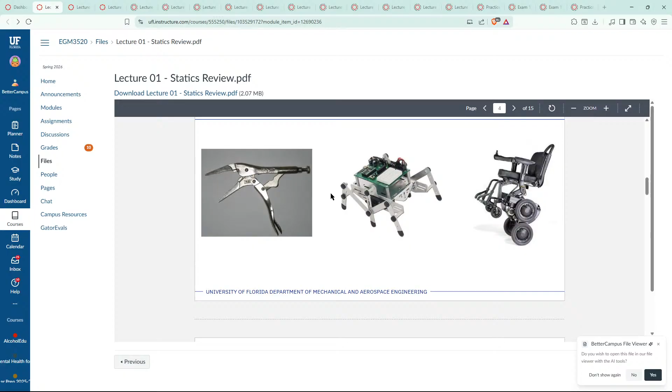Anyway, we're learning stress and strain today, chat.

It doesn't say my name anywhere, does it? No. It shouldn't. If it does end up saying my name, I'm just like immediately ending stream. I don't care that much. This is very much a not worth losing my anonymity. That's a lie. I've lost so much of it already. I think I've already said my name.

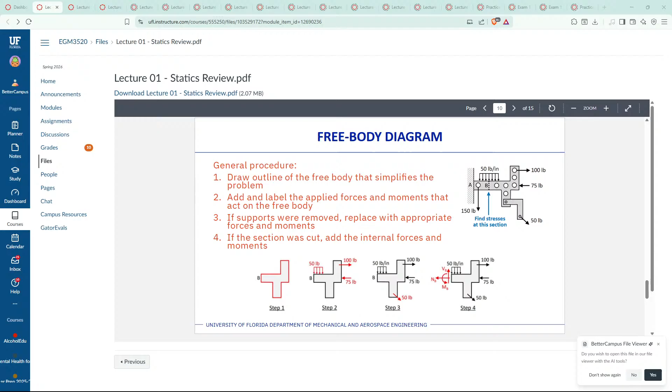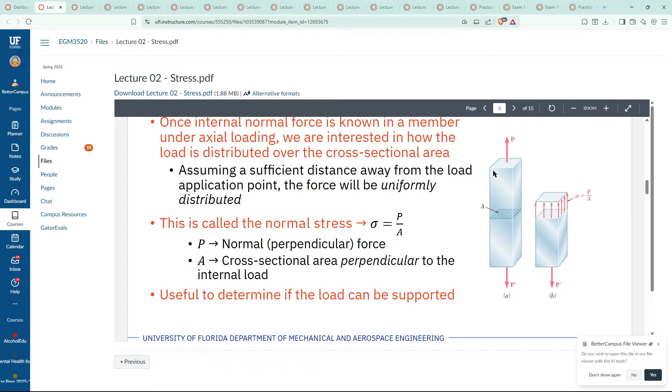There's really nothing. Oh, free body diagram. That's so easy. 2, 4, yada yada yada. And that's lecture 1 done. Stress. It's still like basic stuff that I kind of understand. So this is just you got force P divided by the area, and that's just like the stress, which makes sense. It's just how it's distributed.

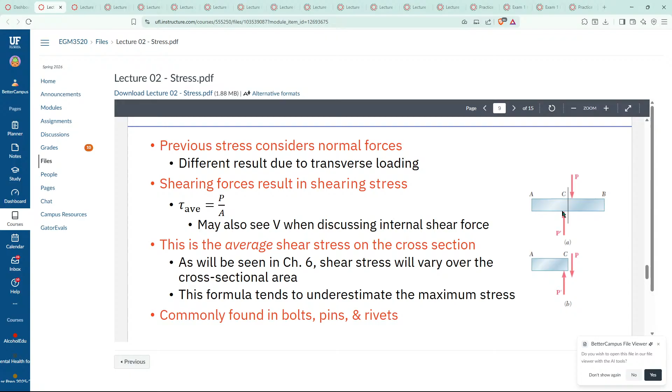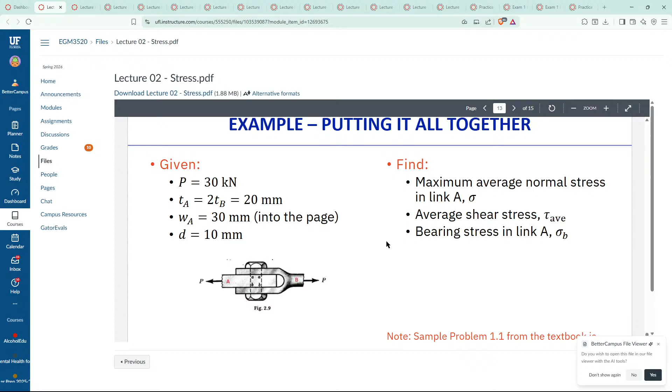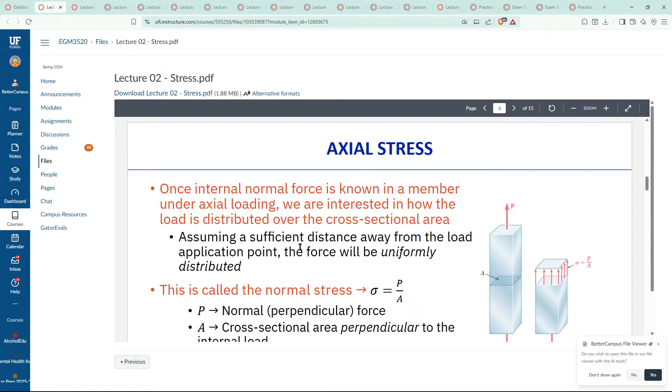Wow. That's it. Guys, we're doing so well. We only have 15 more of these. Actually, that's not so bad. I think I deserve a 5-minute break for that one. Okay, jokes aside, jokes aside. I cannot take another break. There's a specific point I want to mention.

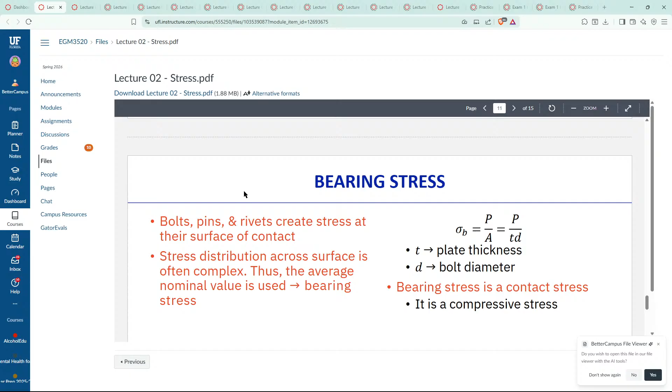Cross section. Cross section. Compress. I have to get my mic. Oh, I forget. There's a way of doing it where you just remove the pin. Yeah. Yeah. Normal stress in pin.

Pinned in tension, pin area. I don't even know what t sub A is. Oh, I think this time's, yeah. Okay, never mind. Because it's theoretically a double shear. Makes sense. Let's go another lecture.

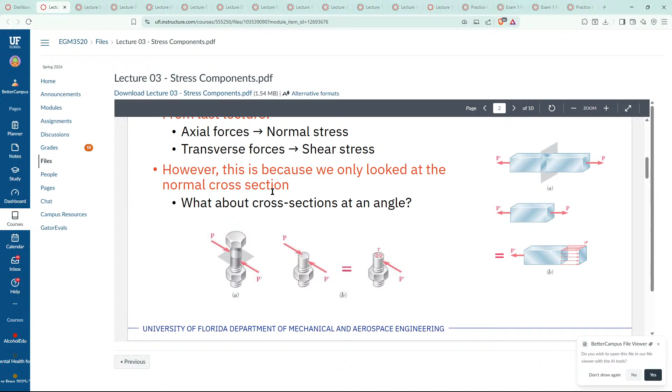I can remove these, whatever. That's why I don't care about deleting them. Stress review from last lecture. Ooh, angle. Angle easy. I fucked up my notes already. I would like to make that clear. You're not gonna get a picture of these, but

I have the normal and then to the left of it because I drew it next to the red line. But I'd like to use the full page. I've drawn angle to the left of the normal. But just because I'm really stupid.

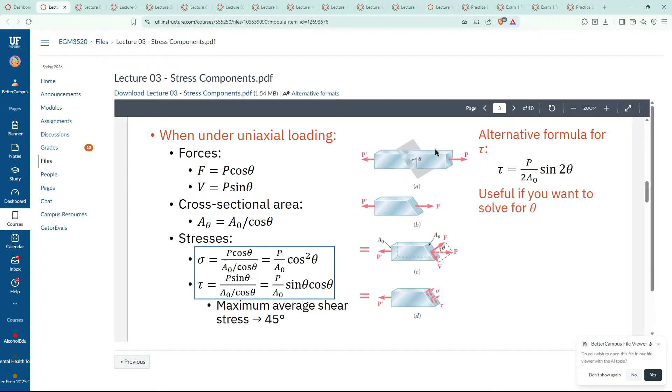I doubt we need to know this, but good to know. Angle from what? Angle from which plane? Angle from perpendicular plane. This we don't need to know. It'll come into play later.

And I mean, if I get it on the test, I'm just gonna say fuck you and then kill myself. That's no exaggeration, by the way.

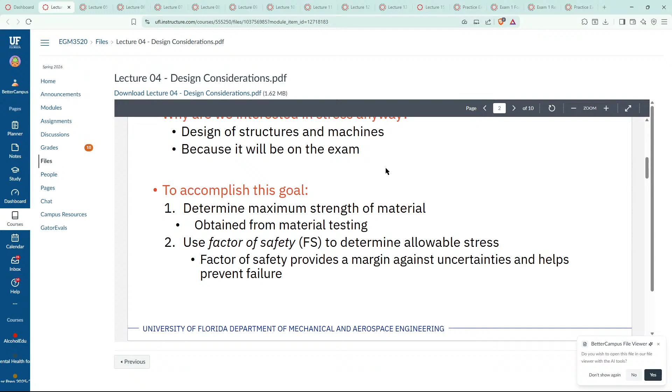Oh, we have the easiest lecture. Let's go. Factor of safety. Literally just, if you have a factor of safety, multiply the actual stress. Or if you have a factor of safety,

if you have the factor of safety and the maximum stress you're allowed to have, multiply it. Wait. I'm not wording this correctly. This is gonna be the stupidest VOD. I would like to excuse myself, being that it is 2:40 a.m.

Oh, I'm such an idiot. I'm such an idiot. I have a research lab that I was supposed to be at on Tuesday. We got the paper on Tuesday morning, and I just didn't read it for Tuesday afternoon. I just didn't show up, and I have it tomorrow before my test for 2 hours. So yeah, from 9 to 11 tomorrow, I'm gonna be like, I'm so sorry. I only thought it was Thursday. I didn't even realize.

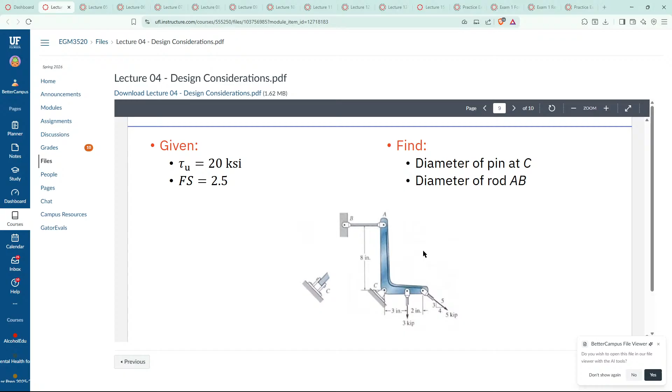It also means on Tuesday, from when I wake up. I don't mean when I wake up because I get up and immediately leave. Well, no, that's a lie. I have an hour to rot in bed for 20 minutes, then shower, and then run to class. But from that, I don't eat from when I wake up till at least 4, including a run. A full mile run or whatever, which is meant to be a 20-minute travel from one building to another building across campus, which I then have to make back because it goes research course, other course, and then back to research course, which is so cool.

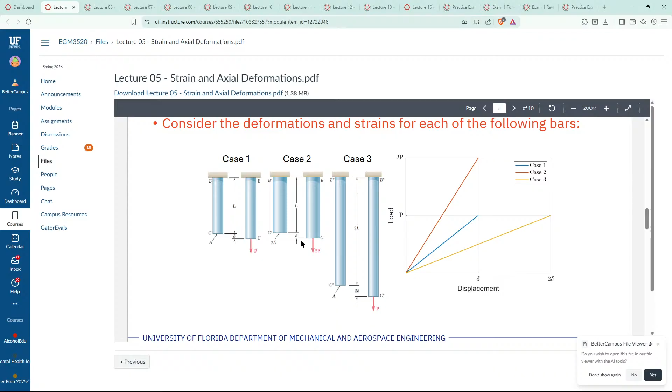Deformations, yes. Give me strain. I would like to add, strain is how much material can move per bit of material, which is a really interesting metric, by the way, because it's unitless.

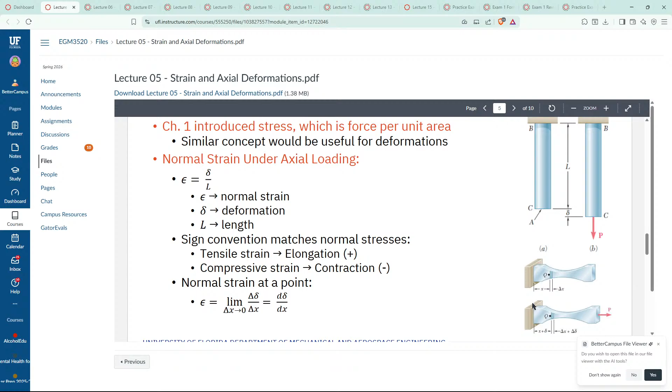So if you have, let's say, 10 inches of material, and it deformed 1 inch, your strain is 1/10. Because every inch of material can strain itself for 1/10 of the total. I'm not calculating that. Well, that'll be a leaving tab open.

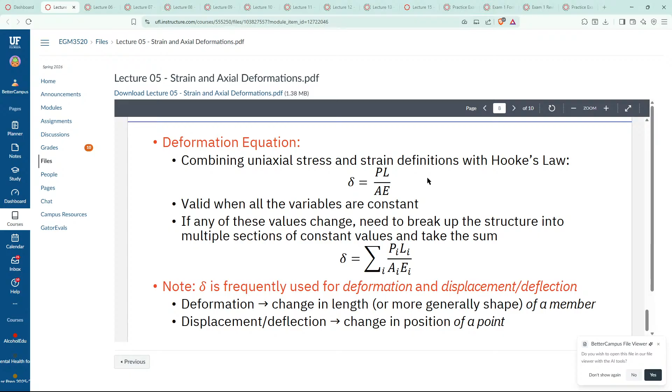This is one of the big formulas. Equals PL over AE. Big formula here, because you can literally reverse engineer this formula for any one of these values. You know the length, but you don't know area? Use this. You don't know E? Use this. You don't know P? Use this. 5 variables in one means you can rewrite it to solve for 5 different things.

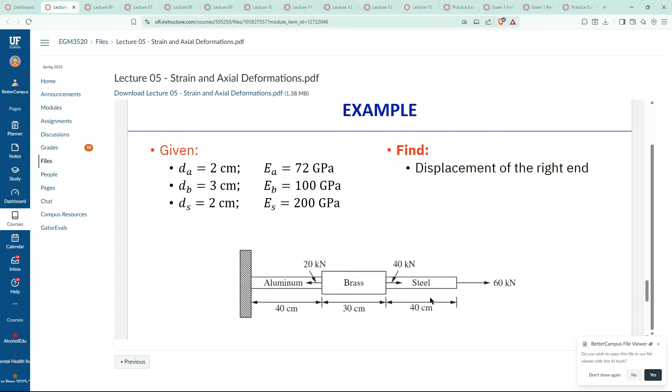And this one, I think you'd only calculate the 60 acting on it. It's like this one wouldn't move necessarily past what the brass moves. Yeah. I'll leave that up because that one's a really important one. But I can't, like, understand myself.

I know no one's listening. I know no one's gonna make it to this point in this video, I think ever. It'd be more funny if you do, I won't even lie. Mechanics of materials person in the future viewing this. That would be funny. That would be really funny because there's way better videos and way better teachers. I don't know where I was going with that. Ooh, yeah, I do. Do not use me for advice. It's kind of funny that I'm doing this, I will not lie.

I can't believe I made it to day 81. I don't think I calculated this correct. But this series will end moderately soon. I know I said a year. I got to 81 days. I might do it for a few more days, but I plan to. I can't. Bro, I'm so mad. I can't even go home for spring break because the week I get back, exam Monday, exam and quiz Wednesday, exam Friday. Me when I'm scheming to be evil. All my professors scheming how to make my life genuinely miserable.

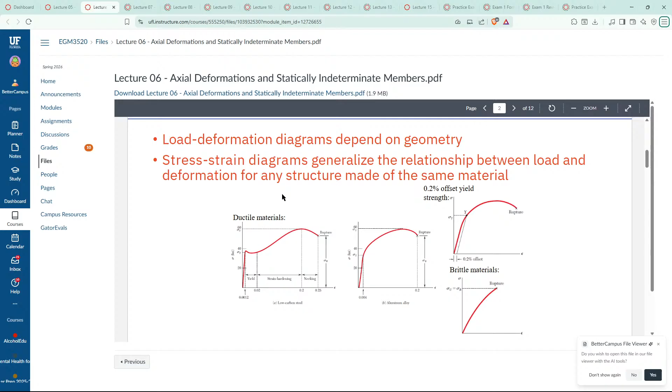Small change in force, so it's large change in deformation. Small force, big, therefore, strain hardening. Limit increase after yielding. And every time you go, it kind of resets the point. So this is the elastic modulus. If you get to here, it kind of drops down there. So it is harder again, and you do have to reach that stress for it to start breaking again. But you have no room for it to deform.

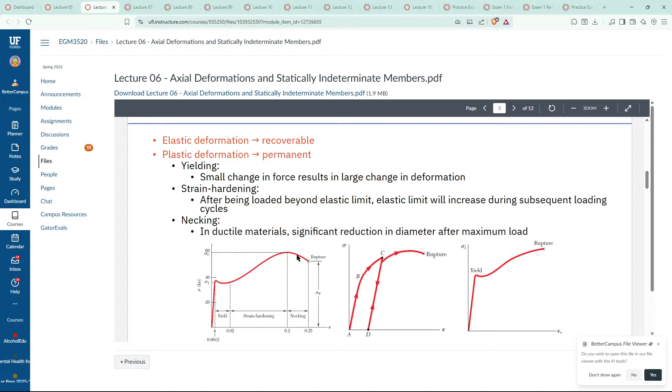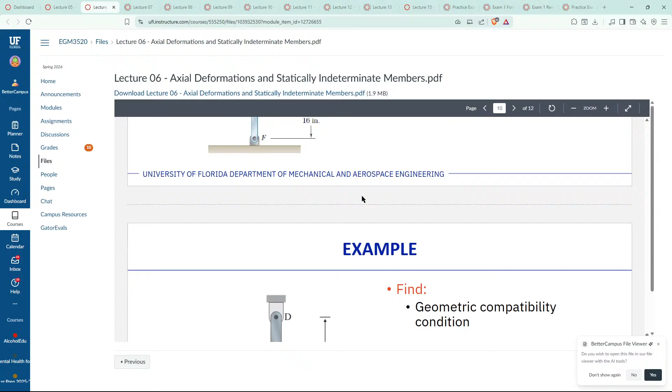This is something I have to review because I get the idea behind it, but I do not fully understand it. Half a page of notes, halfway done. That ain't bad. I do want to say, last 3 lectures or so, I just don't understand the material at all. I know it's not that hard. I just...

was horrifically sick with the flu. Bro. I didn't get my flu shot. Very stupid on me. 100% my fault. I hate shots. I should have gotten it. Hate shots though. And I was in the doctor's office for 4 hours. My appointment was like 8:30 a.m. I was in there till past noon. I was hungry. They're like, hey, do you want to get your flu shot or no? And I'm like, nah, it's fine, whatever. Just let me leave. Because they already messed up something else. It was a whole mess, and I was just tired.

And I was like, no flu shot, and I get hit with the worst flu imaginable. Two weeks, horrendous sickness, constantly shivering, 5 layers of bedding, comforter, blankets, 2 layers of clothing, still cold. Every so often, I take the hottest possible shower my dorm lets me. It still sucked.

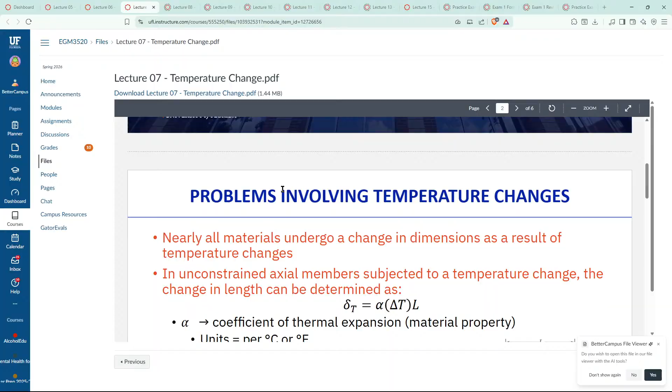What is alpha? Alpha, coefficient of thermal expansion. So what this formula does is basically the coefficient for how the heat affects expansion. Then the change in temperature, which makes sense. So if you go from A temperature to B temperature, that's the percentage that it should change. Times the overall length to give you the change. Makes sense.

This may look scary, but it's low-key just... Well, total deformation is just one deformation plus the other. Force deformation plus temperature deformation. Let's just say I go into the Arctic with a piece of metal, and then I whack it with a hammer. Well, that's not good. Let's say I have a compactor in the Arctic again. You're trying to compact metal. The cold would make the metal shrink, so it would have mad deformation.

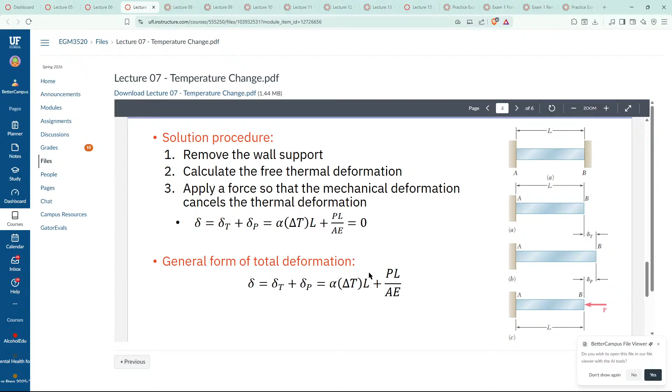Oh, the formulas are different for shear deformation because you take out the length. Because this is per unit.

That's cool. That's cool to know. That's like cool to realize.

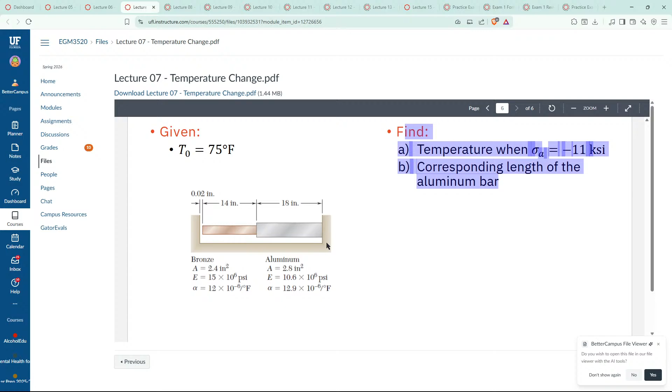Like to say, I conceptually get all this, but can I physically calculate it?

Very past the halfway point. And also getting to the stuff I understand less. This exam is only... I closed the tab again. We're so happy here, this is so fun.

You can see my mouse moving to like see the testing site. Is that a 240-minute? What? Okay, it's a 2-hour test normally. Oh, okay.

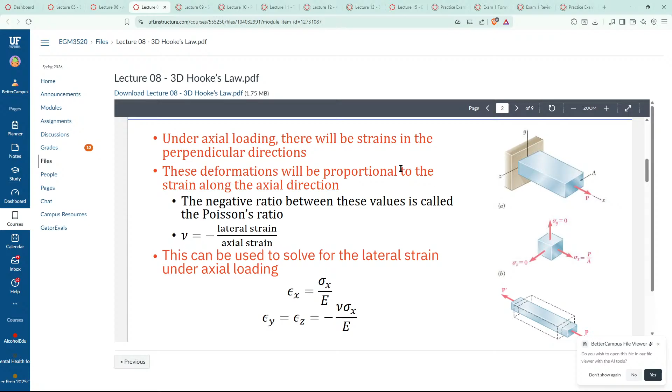And then the y and z are equal because it balloons out in both directions. That's cool. And then what is this saying? To kill myself.

First. Oh, 1D and 3D.

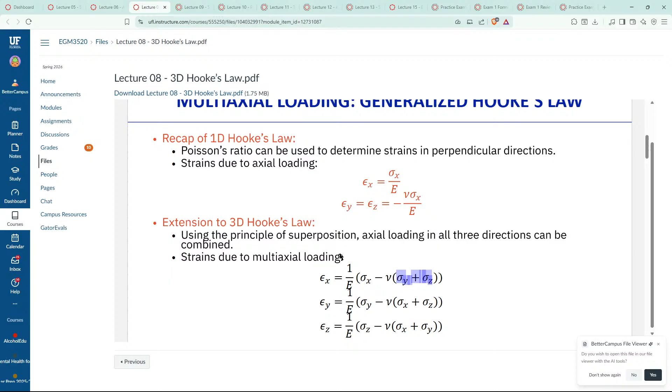Sigma x minus v times sigma y plus sigma z. I'm not writing all of those because it's kind of understood that it's just 1 over E times the stress in one direction minus v times the stress in the other two. Dependent.

Homogeneous. I don't think it's gonna be that big a deal. And then worst case, you can just kind of add them all together.

That's kind of gross. Like, I get the meme of engineers generalizing, but saying the volume instead of 1 plus the change in x plus the change in y plus the change in z could roughly be equated to 1 plus each of them is kind of just crazy work.

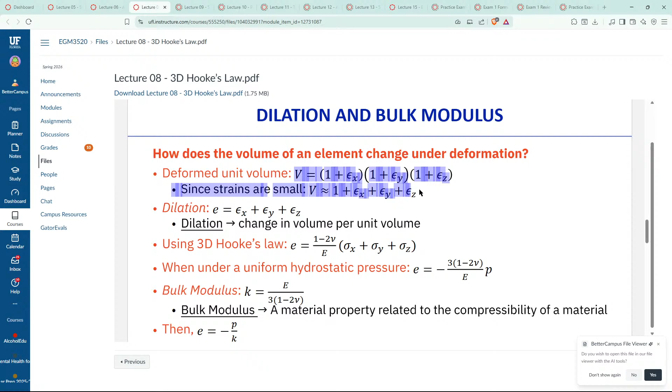Then you kind of get crazy with it. What? What are we doing here? Shear strain. G.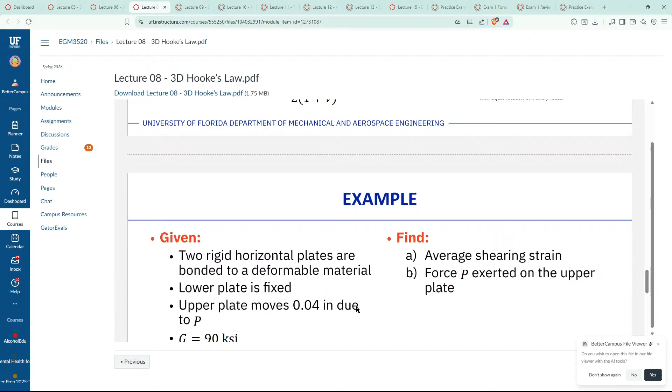7 more, by the way. This here is where I finally kind of lose it. I will not lie.

We still have stress concentrations. Plastic, plastic can be bad. Torsional. Yep. Nope. These 4, I was sick.

Seek. I mean, that's fine, I got through like half of them and filled up a page. Not well, but.

And I do want to add, when I first reviewed this PowerPoint, I thought this was Poisson's ratio, which is the V. Just now am I really realizing, it's not.

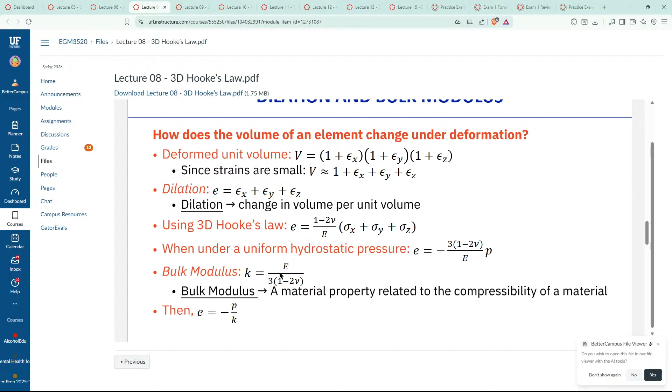I get where it gets at. I don't like it though. Elastic modulus, Poisson's, and shear modulus.

Shear stress equal modulus times strain.

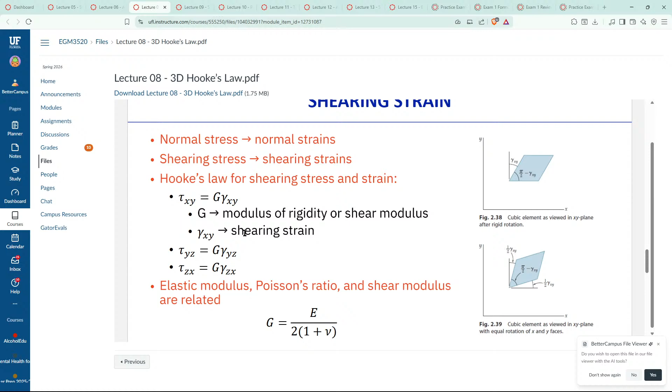Okay, makes sense. I'm leaving that one open now. Concentrations.

Mode of force application is near the point of application. Now this makes sense. It spreads out. Complex structures like an onion spread.

Rigid plate versus point load? Oh yeah, if you just toss a plate on it, kind of spreads it equally. Roughly.

I don't like that it's bolded. That means it is definitely important. Saint Venant.

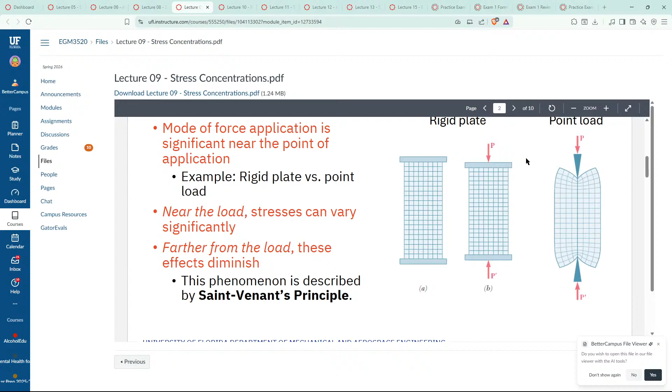I read like a schizophrenic, but I'll be able to understand it. I mean, this makes sense though.

Crushing, you would kind of balance out into like 0, and it would be closer to like kind of balancing out.

Like if you karate chop something, it's breaking where you karate chop because of this principle. That's a good way to put it.

What is K? K values obtained from standard charts.

So max stress over average stress, when you obtain them from charts. So if you know what the average should be, it would just be the normal calculation. I can then use the K value.

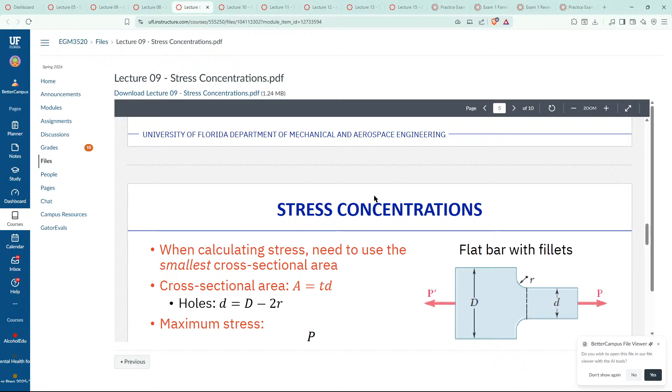It kind of looks like I wrote chart, which is amazing. Oh, bars with fillets too.

You know, you kind of only see harsh corners where it's basically unnecessary. Like think of all the fully square things around you, like my PC, where the main square parts are things that just kind of exist.

Like yeah, the far corner of my PC is not taking any stress. Like oh no, it barely has to hold the weight of a frog I put on top of it.

Stuff like that, like the fans, even they have rounded corners on the housings. I think that's for aesthetics, but like the idea is still there. The idea is still there.

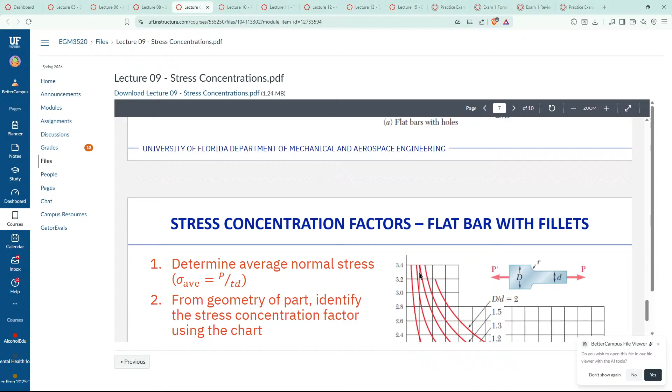3:20 for me, by the way. I have to wake up. I'm not gonna get 5 hours of sleep, man. I took like 3 naps today because I was so tired from working yesterday, so I could have the free time today to study.

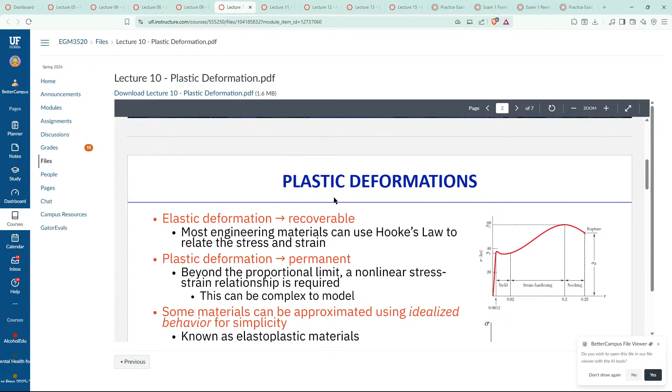Example. Oh, that wasn't so bad. 5 more lessons, because we already know. Less material. Move up here, goes back down. We should load until it is... Oh, they don't explain anything here.

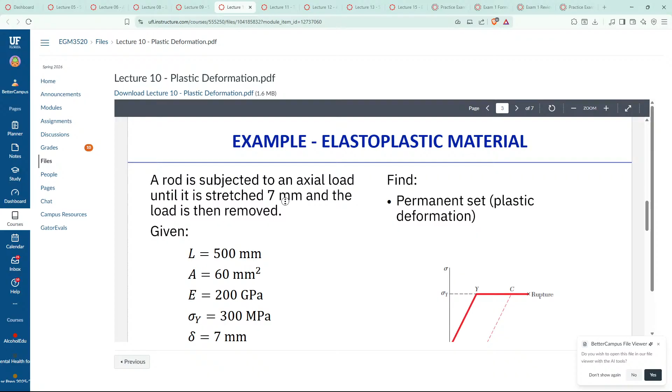7/500 minus, from here to here, because it goes back down. We're just calculating this distance, honestly. Rounding it to the base. Which means you could just do, what, 7/500, maybe? I'll look into.

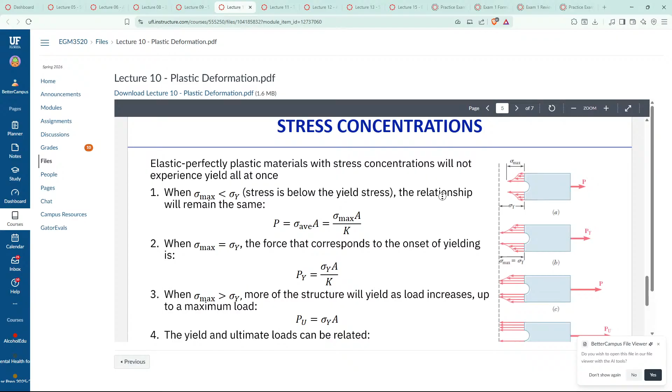Concentrations. Ooh, they put us in a lot. Just because these will not experience yield all at once.

I'd also like to add, we're at least 3 weeks beyond this in class material. This class isn't even that bad, I must add that.

Generally making me consider material science. Well, material engineering, not material science, those should be different. Man, I'm so tired of Arrow. I should message my advisor, how change? Side face emoji. Okay.

Elastic-perfectly plastic materials with stress concentrations will not yield all at once. Yeah, because if you pull something with like a ring around it, the ring stretches more. I was thinking about like plastic, like we've all tried to whip apart plastic, and we see how it widens as it stretches. I assume because the coloring is just a thin layer on the outside, so if the outside gets stretched or deforms in any way, specifically stretched, it kind of just puts a bunch of space in between them.

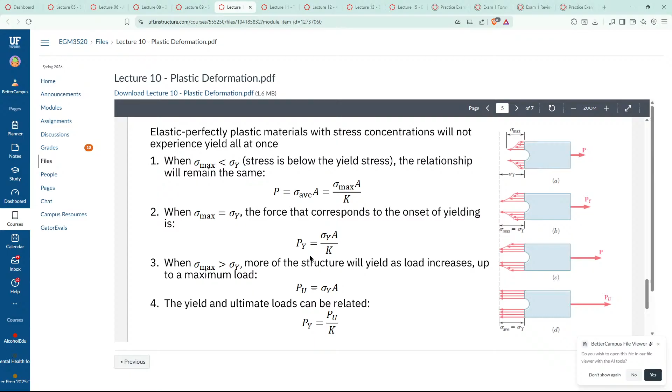We go along here's when once enough members have yielded, which I'm assuming is like both of these.

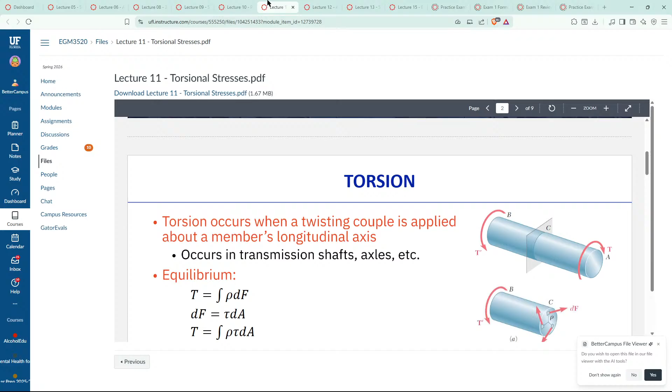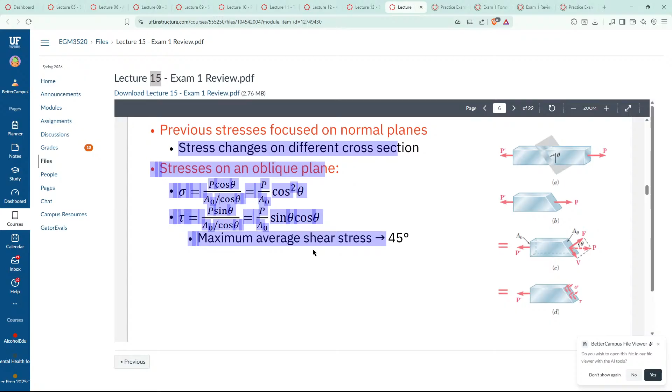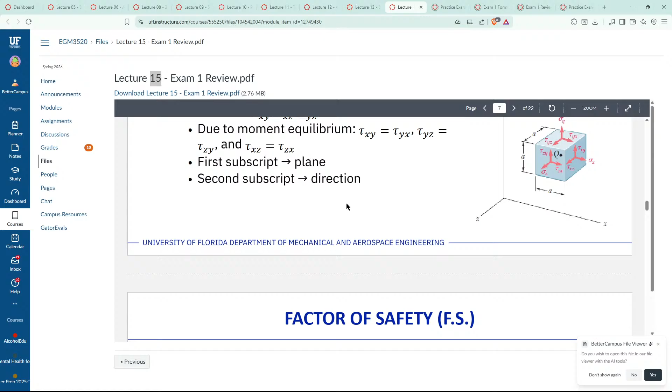This is quite new, four lectures of new. Can't be that bad. This is exam review with stuff I know, stuff I know, stuff I know and just reviewed. That, yeah, makes sense, makes sense. Yeah. Yeah.

The deformation is the sum of deformation in one plus deformation in another. Okay, whatever.

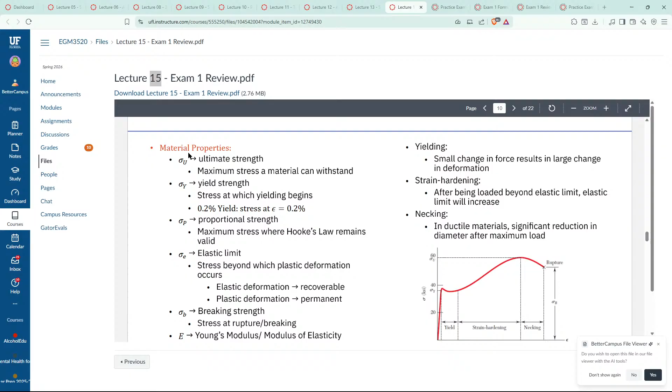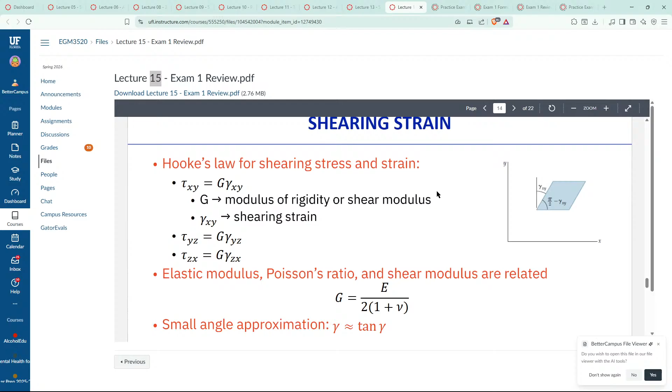Transmission shaft, axles, etc. Equilibrium. What is T equal? What is any of this equal? Oh, T is turning force.

I don't know what I'm looking at. This is gonna be me watching a video later, not on stream, because I'm trying to do everything but watch other people's content on stream.

I have before, I don't like it as much. I don't know if I can really... I like to transform the content I watch, which is why I'm going through and kind of explaining each thing. I'm someone who knows the rough idea of it. I don't know, I don't want my content to be like the people who just put on daily dose for their entire sleeping stream, or the how it's made streams. That's why I haven't done an overnight streamathon. That and setting up a camera to watch me sleep is, one, a little weird.

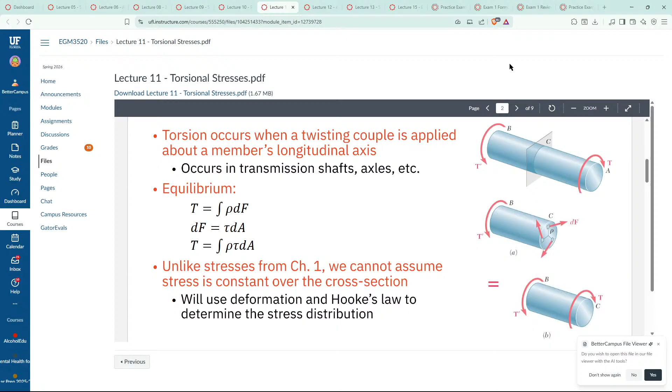I don't like this. Derivative of area for T. I don't... Focus on particular shafts in class. Torque will be inducing twist.

Angular twist makes sense when plane and undistorted. This is parallelograms, this shear strain. On each individual section, yep, because it changes. Cool.

This is a lot of jargon. I'm trying my best, guys.

I will go to bed in like 25 minutes because I need to get at least 4 hours of sleep, I hope. That's the goal. Watch me get insane insomnia.

What is A dash? Uh, it's just a change.

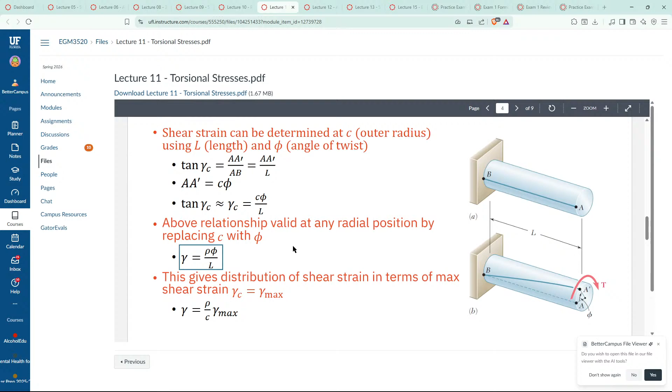I assume I'm gonna treat this as a general formula, in terms of max shear strain using Hooke's law. Yeah.

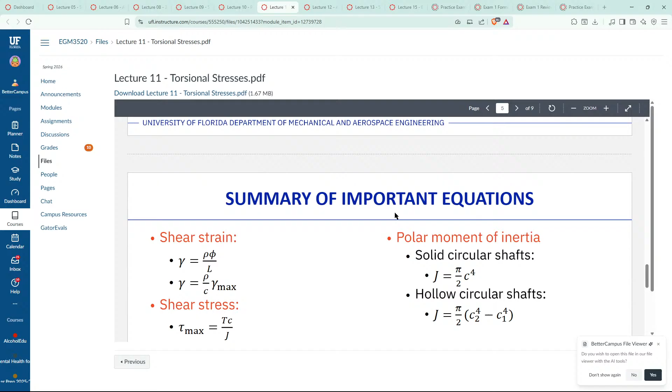And what is J? J is polar moment of inertia.

Stress max equal T C over J, equal rho over C, tau max equal T rho over J.

What is T? T's the... is T just torsion? Okay, so torsion times the outer radius over J, polar moment of inertia.

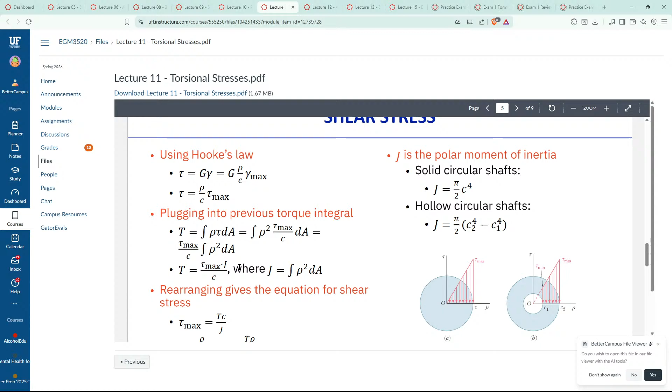It's gonna be 2 pages. That's fine. Okay, and then equations.

Solid equal J equal pi over 2 C to the 4. Hollow equal J equal pi over 2, C2 to the 4 minus C1 to the 4, which makes complete sense. Cool.

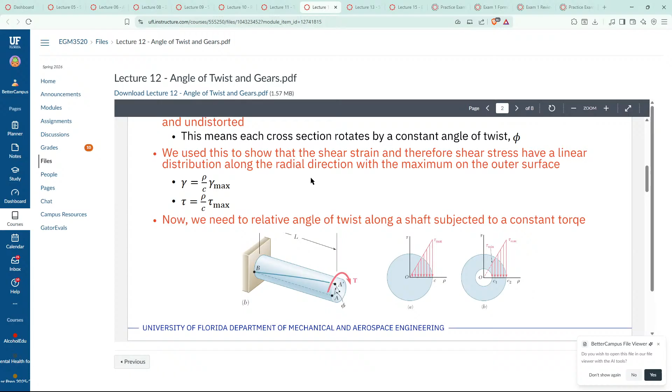It is very easy for me to say, like, oh, I completely understand that by just glancing at the lecture. We will see if I completely understand when I wake up tomorrow morning, and give myself 6 hours to completely understand the material.

I really can't even see the message. I'm moving my grades to a new window, for a few reasons. One, I don't want you to know my grades. But I'm not gonna lie, I have an 89 in this course.

And a 90 can't even bring it up to an A. I mean, I guess I need like a 91 here. Exams are 75% of my grade, and there are 3 exams, so that is, what, 75 divided by 3? 12% my grade? No. 75 divided by 3? Each one's like 22%. No. 25. Oh, I'm stupid.

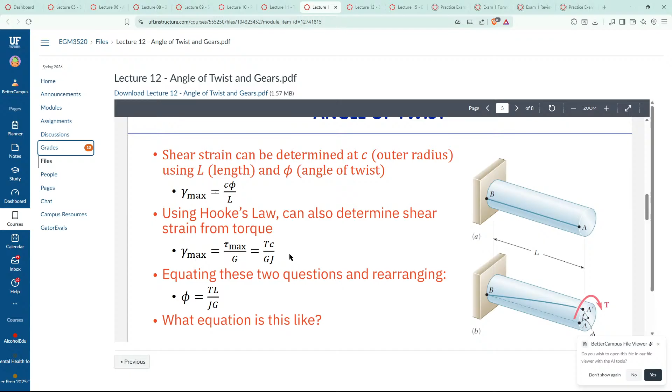Now I'm gonna need to understand all these relationships. Divided by 4. Let's use some integral, which is a summation of the twist in one, twist another, twist another. So like if this is net 0, you have to get the twist here and twist here, then negative for those.

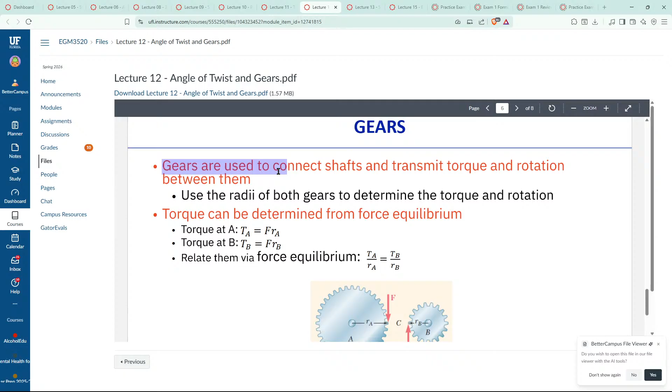Gears connect shafts, transmit the torque and rotation between them. Torque and rotation. Torque A, TA equals F R A. Force times radius here. TA over RA equals TB over RB.

Cool, rotating gears. Length that the gears rotate are equal. Specific gear turns, other gear turns in proportion. Direction switches. Anyone who's done anything with gears ever or played any puzzle game knows that one.

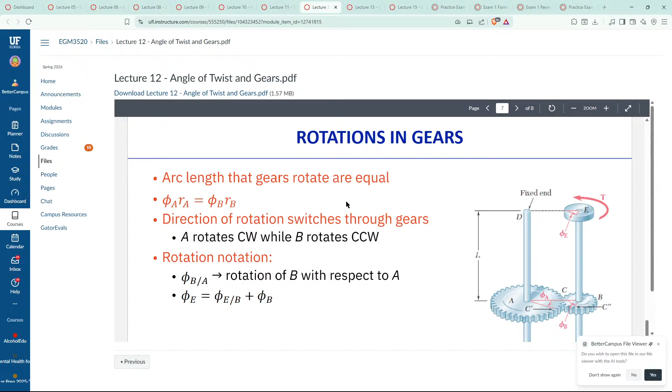Rotation notation. B with respect to A. I don't know how that means anything, but... 2 more.

I think I might have skipped one. No. Nope.

Chapter 14 was done a little early. That's cool. Oh, that makes me so hype.

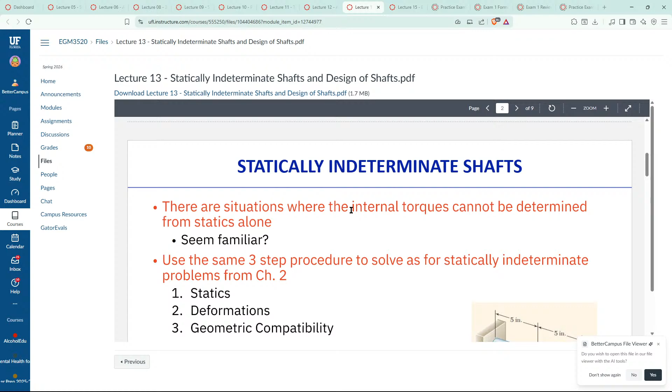Indeterminate shafts. Internal torque cannot be determined with statics alone. Seem familiar? Some of the statically indeterminate problems in Chapter 2. Statics, deformation, geometric compatibility.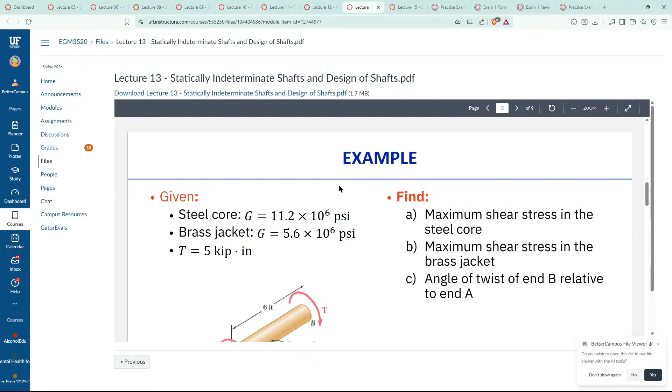Newton times meter second, T. Oh, T is torque. Wait a second, that's cool. Then you can do P equal 2 pi f T, equal frequency.

I've got 2 other ones off to this side, which are just other ways for power, which are more than likely not more important. If power, we literally just got this one. We already have that one. We already have that one.

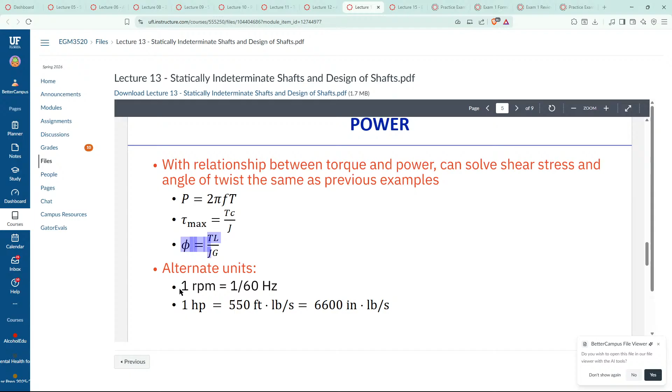No, I'm not waiting on that. Stress concentration in circular shafts.

Yep, because that's how you literally immediately get shear. That's so interesting, that's literally like textbook shear. Like anything you can get to spin on something else, that's what that is. Because it just makes the right angle, it's so easy to spin.

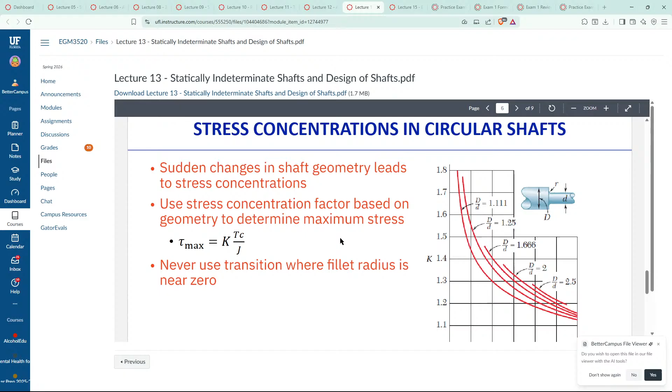Maybe you twist a knob, it like feels it's inside though, if I'm wording that correctly.

Oh, I did that like 10 minutes early too. Well, we finished the general view. It just goes outside the shaft first.

Unless it like snaps directly off, but eh. TY, first yield point, TP.

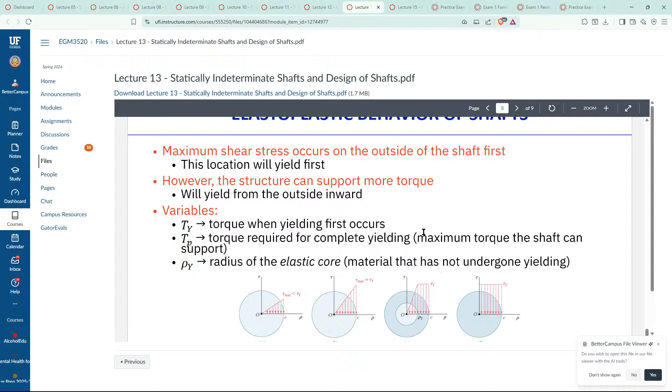Full yield. I'm sorry for that one, guys, I'm genuinely sorry. Radius of elastic core, not yielded mat. No.

Elastoplastic behavior of shafts. In previous theory, same slide, no longer valid, for solid circular shafts made of elastoplastic material.

I'm not forgetting that equation. That equation is not getting recorded. That's a lie. Nope, I'm sticking to my word. Unless... Ooh, I gotta memorize that.

Statically indeterminate problems, chapter 2. Don't fully understand that. To be indeterminate.

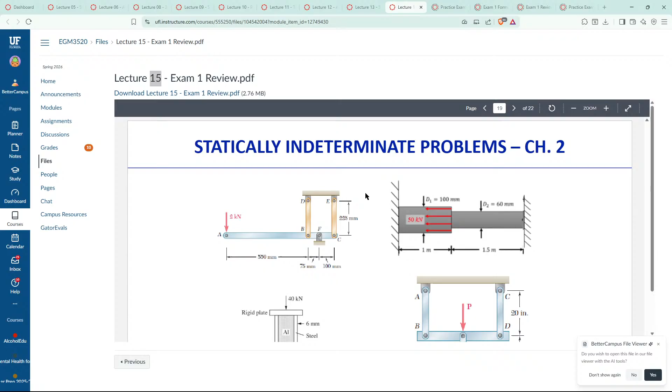Tensile, because you're testing the outward strength. Torsional loading pops out like clean if it's ductile. Brittle, it kind of just shatters in a way. Brittle is worse with normal. Ductile is best for shear.

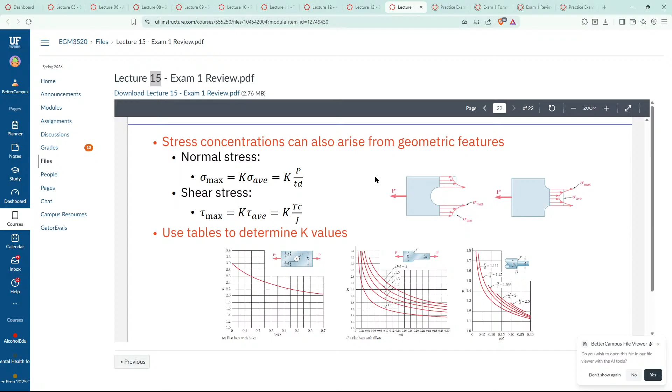Stress concentrations. Remember, K is for if there's like a hole, so it's the force around the hole and concentrations. Understand that? Understand that? Nope. Statics alone is insufficient. Does that calculate deformation, angle twist in terms of that?

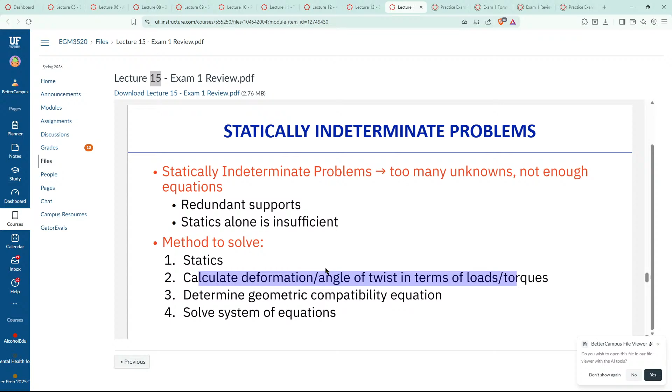Get most of it. Understand this part, understand this part, understand this mostly. Understand that, understand those mostly. Basically understand all that. Well, this has been an hour and a half streaming of my studying, a good chunk of it.

I will not stream until tomorrow night, or I will pass away in my sleep. That's a joke, I will not actually pass away in my sleep. I intended it to come out more like, unless I just pass out after my test, because that's the end of my day tomorrow.

To be fair, my test ends at like 9. I forgot to mention, my ADHD is so bad I get double time. I did see some guy ranting about how double time's not the true solution, because you're giving someone who gets easily distracted more time to do a task they're gonna get distracted from anyway. They find it boring and it's an issue for them getting distracted. You're gonna put them in a room where they will find a way to get distracted anyway, because that's just how it is.

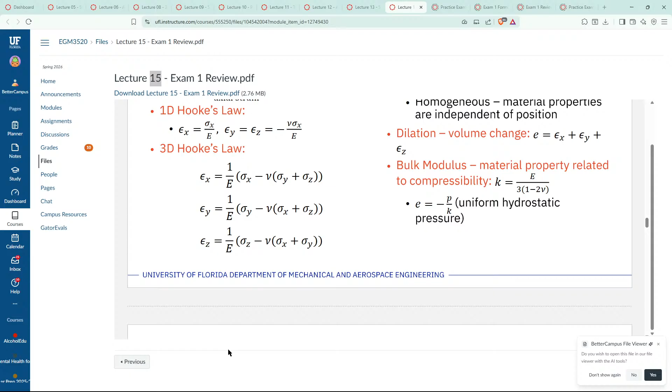Anyway, I'm done, it's 4. I'm tired, I gotta wake up early. 4 hours of sleep, 4 hours ain't bad for this. To be fair, I get the rough idea mostly. I don't know if I can do a practice exam. Whatever.

Who cares? Indicate a failure surface by drawing a line or putting an angle on the specimen below. Brittle is diagonal, ductile is flat.

By the definition of shearing strain: strain caused by forces perpendicular to the object. Basically, the force over area — the force is perpendicular to the object, and the effect is the force over area.

A part is loaded by torque T. The maximum shear stress occurs... it's loaded by torque. That's really along an axis. Well, I think the surface is the main one, the maximum shear. It breaks out, so it should be on the surface.

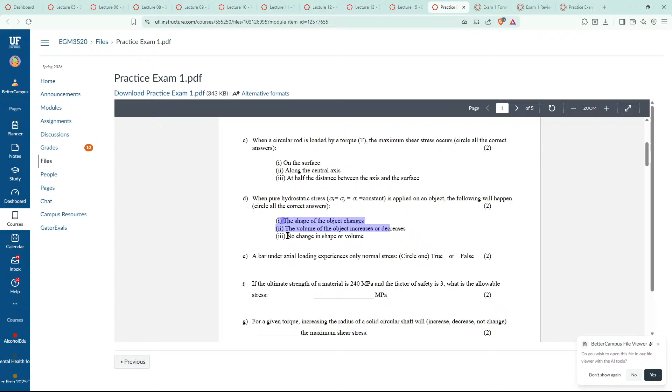Yeah, just like stress — when an object, find what happens, the shape of the object changes. I mean, yeah, yeah. Yes, yes, absolutely not. Which means only normal stress.

False, you can brute force an up-down stress with the condition. If the ultimate strength of material is 240 and the factor of safety is 3, where's the allowable stress? You divide that by 3, because that's the ultimate strength. Which would be what?

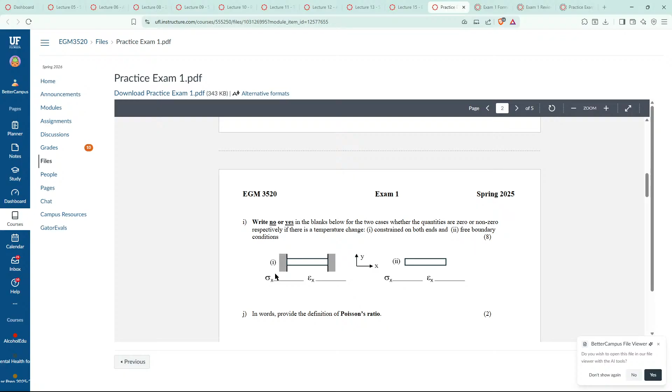Poisson's ratio is the v, and v is like the ballooning and squishing of an object and how it affects the other relations. Let's say you pick a marshmallow and squish it, how it goes in the X and Y plane. Let's say you squish it along the Z axis, how it stretches out in the Y and X plane.

For the stress state, determine the normal strain in the Y direction. So we have the ratio, and we have E equals 70. Okay, so I'm gonna get deformation by 20 times 70. This is what — 1 over e, 1 over 70, times...

I'm not entirely sure. Oh, it never ends. It never ends.

Stress-strain diagram for ductile aluminum. Label the yield strength, ultimate strength, rupture strength, and modulus of elasticity on the diagram. That should be pretty easy.

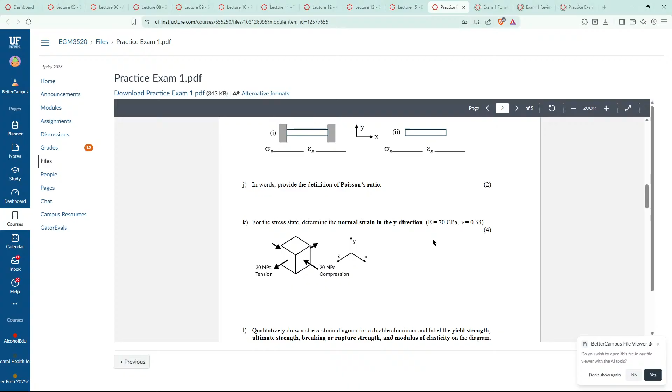Okay, that's a struggle. Ooh, how many points is this total? 30, 30, 40. Ooh, that kind of hurts. Okay. Ooh, okay.

Hey, it shouldn't be too bad. You know, think, yeah. So I know how to apply it, I can do it. I say when I look at this one and cry — this one shouldn't be too bad.

We're gonna do rigid plate H. It would just be like force, force. So, you know, it's 40 in, and there's an out, out, and out. So there's 3 forces we don't entirely know. For static equations, this part is statically indeterminate.

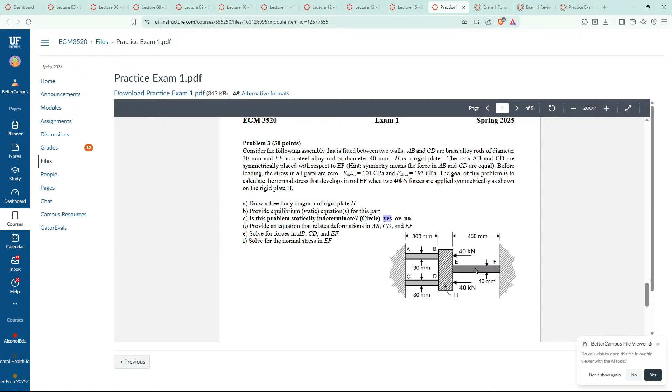Yes — relates deformations in A, B, C, D, and E, F. Solve forces A, B, C, D, and E, F. So the normal stress in E, F. Okay, I'll think about how to do that.